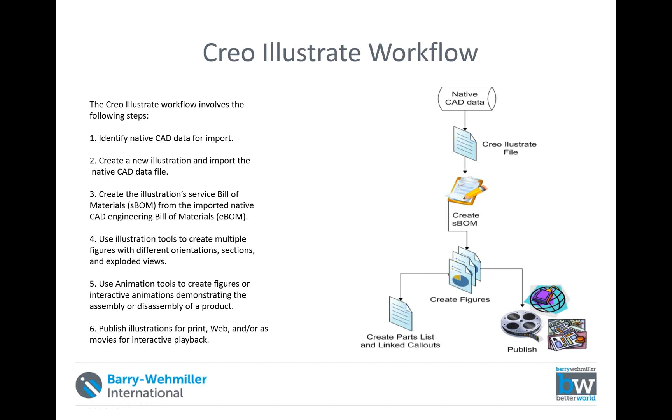The next step in our Creo Illustrate workflow is using our animation tool to create figures or other interactive animations that demonstrate the process of assembling or disassembling components from an assembly, or for servicing those components.

Now, another thing we need to look at is what are the drawbacks with the traditional methods that we currently use.

First of all, the technical information presented is in page-based documents and is actually text heavy. At the same time, whenever we create these illustrations, they have to be managed manually. We have to go back and do all those updates manually.

Now, in Creo Illustrate, we can always create a link between the CAD files we are using and the Illustrate file, so we can do those updates automatically as well.

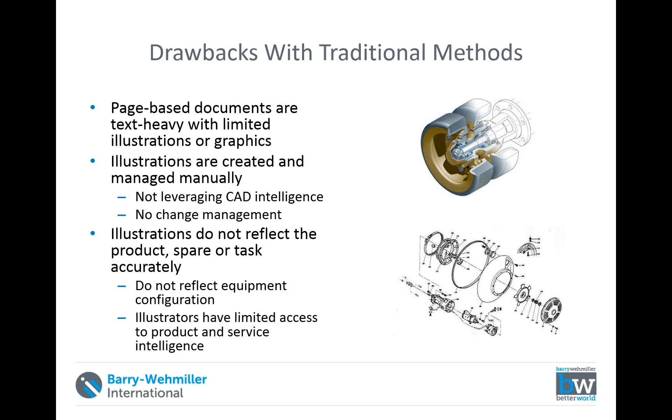Before we look into the key benefits of Creo Illustrate, I would like to open the software and look at some of its capabilities.

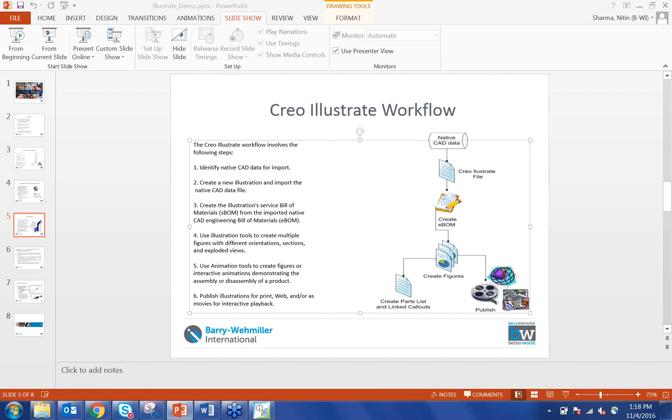For those of us attending this webcast who are Creo Parametric or Creo View users, what you can see here is that the setup for Creo Illustrate is very similar to Creo Parametric and Creo View.

Also, very similar to Creo View, we have the ribbon with different commands and different groups underneath them that we can use. The first thing I'm going to do here is simply open or import a file.

So now here is an important step. If we create the link between our CAD and Illustrate files, we can tell the system whether we want confirmation of the updates or if we want to do the update without any confirmation. That's something we can set up at the very beginning when creating these Illustrate files.

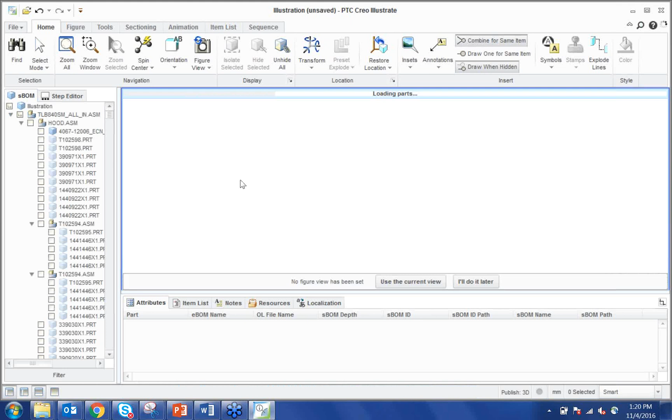It's going to take a few seconds because I'm trying to open a large model. So first of all, you'll see that the current model I have open in the window has more than 3,000 parts in it.

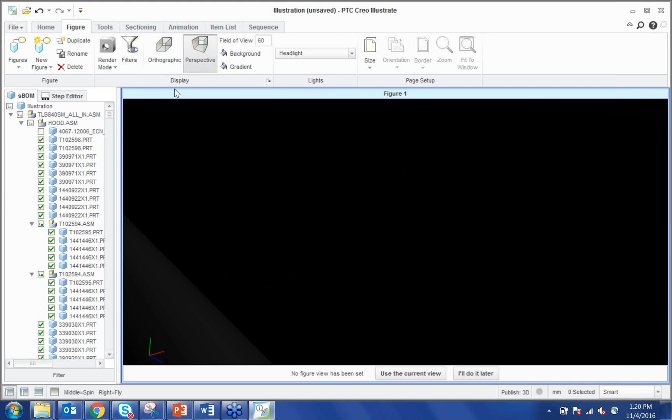Now, talking about the setup of our models, first we can look at all the different view options available to us - that is, the orthographic or perspective modes that can be used in Creo Illustrate.

Another thing that is a little different about Creo Illustrate are the mouse operations used for changing the orientation of our models. For users accustomed to Creo Parametric, they can always use the spin center, so whenever you use your mouse to change the orientation of your model, it will behave like working in Creo Parametric.

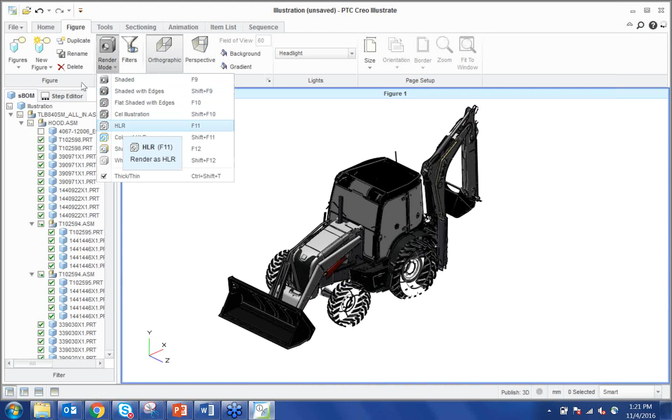Another thing we have in Creo Illustrate, accessible from the Figures tab, are all these different rendering modes. Let's give it a couple of seconds to update. One of the most popular options available from our rendering mode is this HLR.

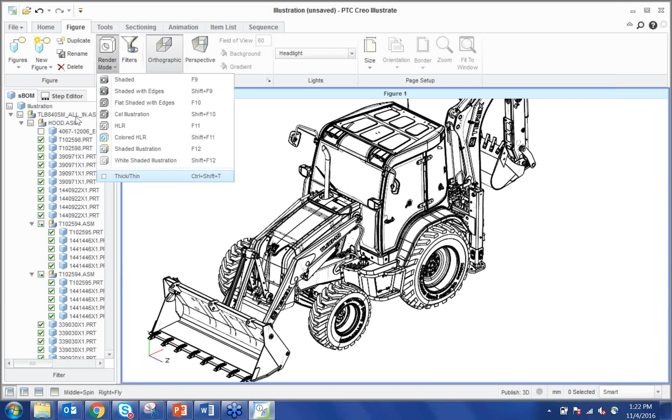Another edit capability in Creo Illustrate is the thick and thin option. If we don't want to see the minor details on our models, we can enable or disable this option with all of these rendering modes except shaded.

Once we've defined our shading style, Creo Illustrate also captures different orientation styles for your models. Usually people capture all this information with the help of these figures. What I like to do is create a standard setup for the very first figure, and I like all the components from my model to be included in it.

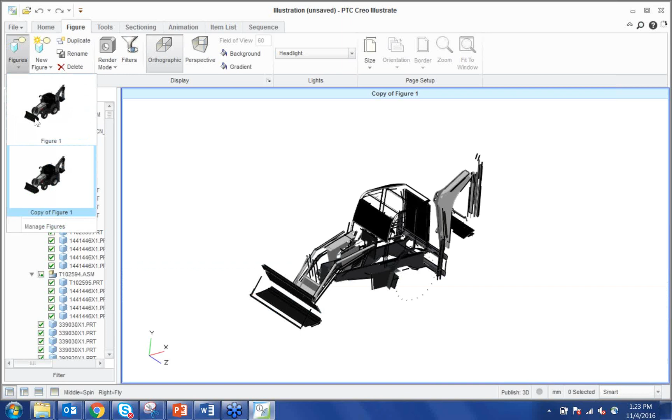If I want to add to the list of figures, I can create a new figure, or I can create duplicates. In this specific case, once we have the image created, we can give it a more meaningful name - I'll call it cross-section.

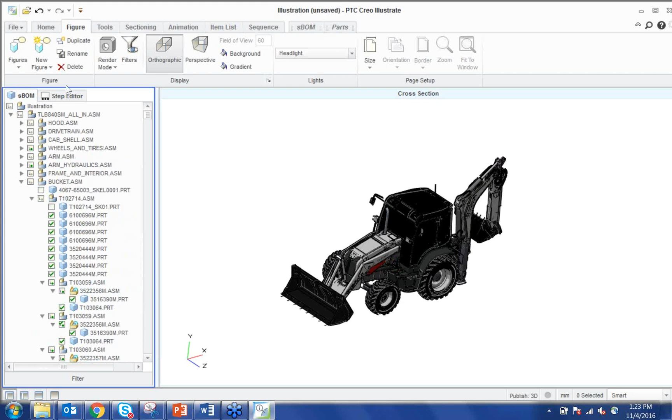Now, once I have my image created, I can simply specify which of the different components from this model I want to include in this figure or not, using the left-hand portion of the interface. Once that is specified, another thing we can do is create cross sections for our models as well. For the creation of the cross sections, I will simply go to the sectioning tab and click on the view section option.

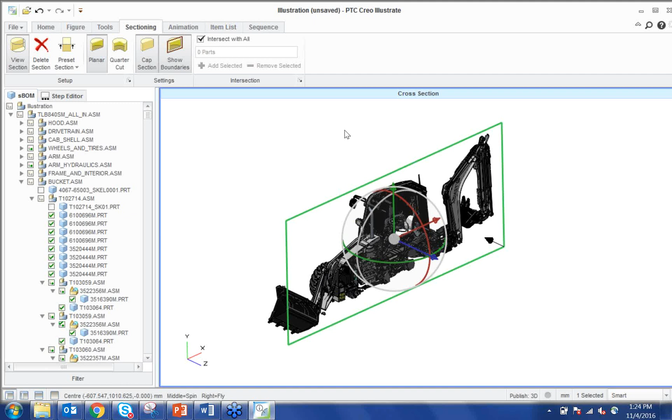As soon as the view option is selected, you can notice that we have a cross section created on the model that uses the datum plane. Now, if we want to further manipulate this cross section, we can use any of these axes from here.

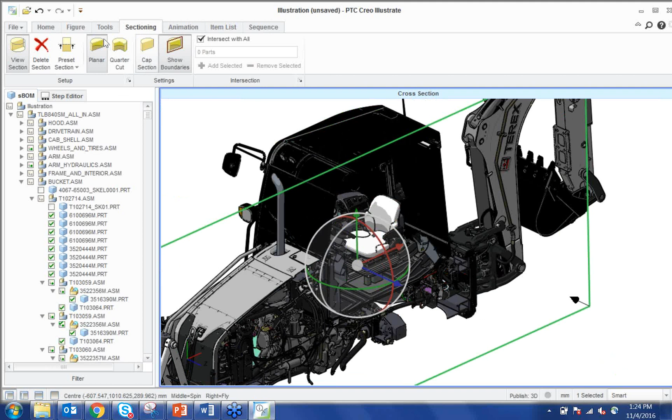Another thing that can be controlled over here for our cross sections is whether we want the system to cap the sections for the different models or not. Not only can we create planar cross sections over here, we can also create quarter cuts.

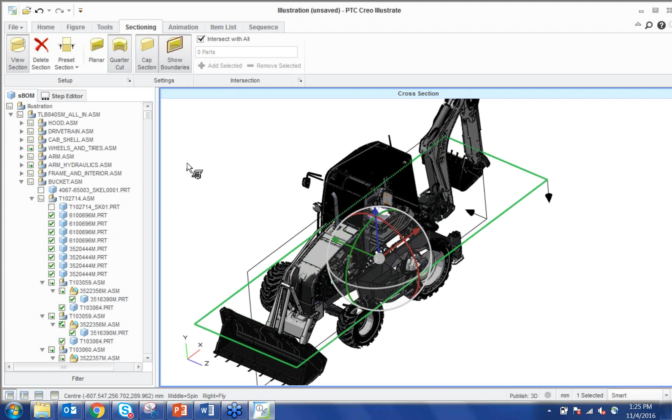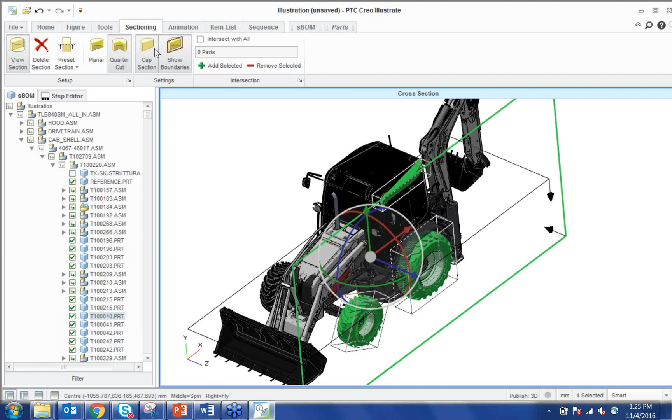By default in Creo Illustrate, whenever we try to create a cross section, the system automatically creates a cut through all the different components selected in the list on the left-hand side. Just in case I want to create a cross section on certain components or selected parts, we can use Control, select all those components we want included in the cross-section, and say Add Selected. Once we have selected those components, we can again go and manipulate it.

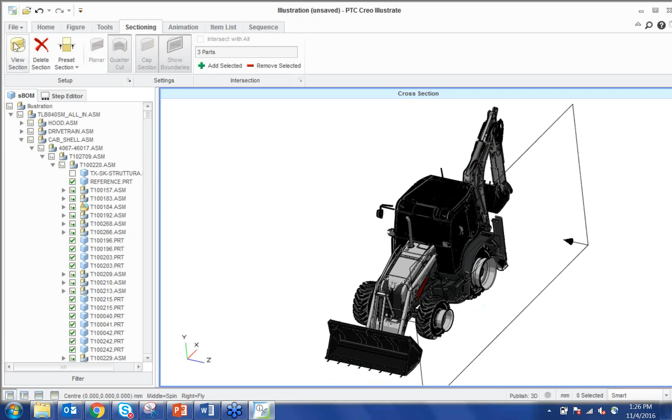Right, and just to show you that right over here. So one thing you can notice is when I'm creating this cross section, instead of the system creating a cut with all the components, it only creates a cut with these three components that are selected on our list over here.

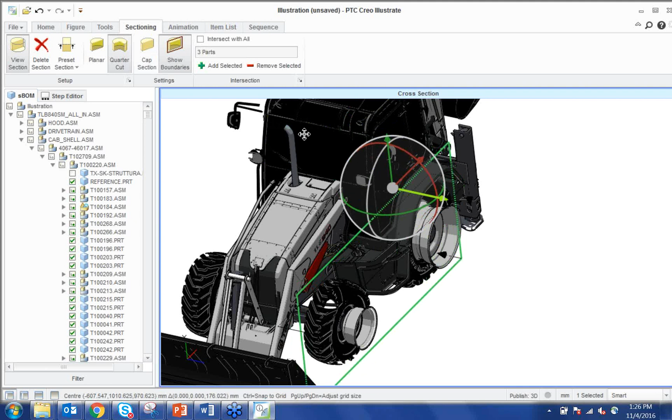Once we have done this, the next thing that can be done is, if we want, we can always create multiple different cross sections. All those cross sections can be defined using our section properties tab as well. Just in case I want to change the rotation or translation along or about any of the axes, we can come over here and manipulate that as well.

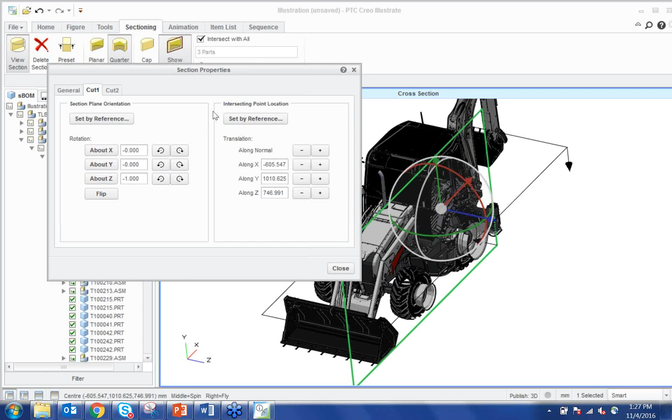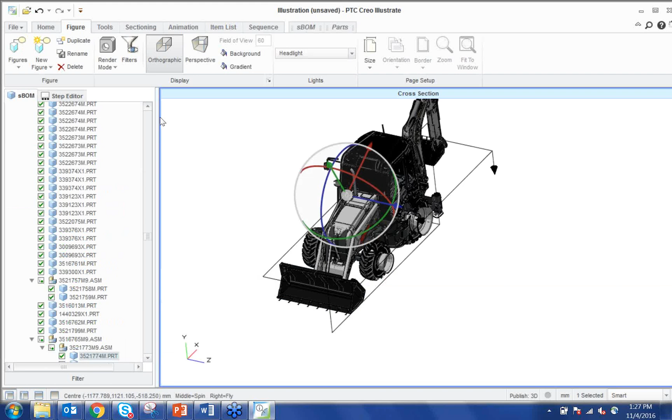Once we are done with our cross-sectioning tool, the next thing we are going to do is go back to our figures tool, to the figures tab, and create a new figure that will again be a copy of the first image we have over here. So I'll duplicate this one, and here we have the copy of figure 1 created. Once we have that, I will give it a meaningful name, and I'll call it, say, animation.

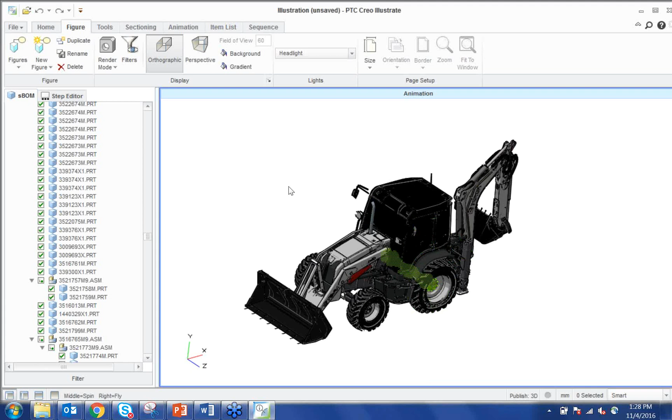Now, one of the most important aspects of Creo Illustrate is that all of these images we are creating can record the service information. Not only can these figures be used as images, we can also use these figures to capture our animation effects inside them.

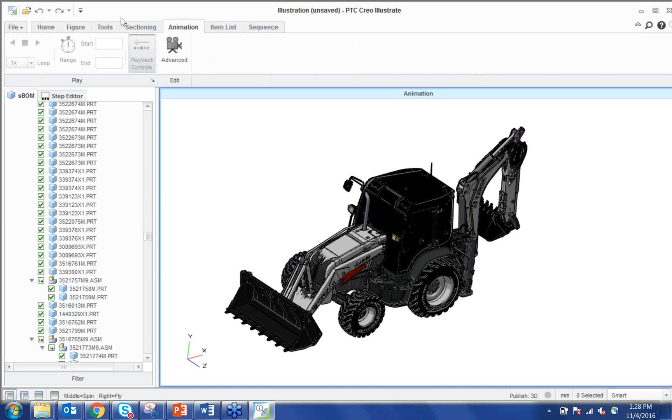Now, for this new figure that I have created, I would like to show how to disassemble some of the components from this particular assembly for servicing purposes. In order to do that, I will go to the animation tab and use the advanced controls from there.

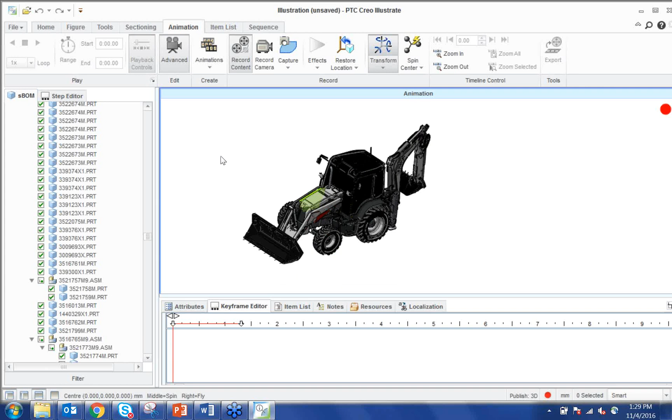Whenever we are creating these animations, the system automatically adds this portion at the bottom of our screen that shows the timeline of the animation running across the screen from left towards the right. The first thing we can notice in this animation tab is we can always record the content of these animations that we are creating. Once we have clicked on that, the next thing you would notice is this red dot.

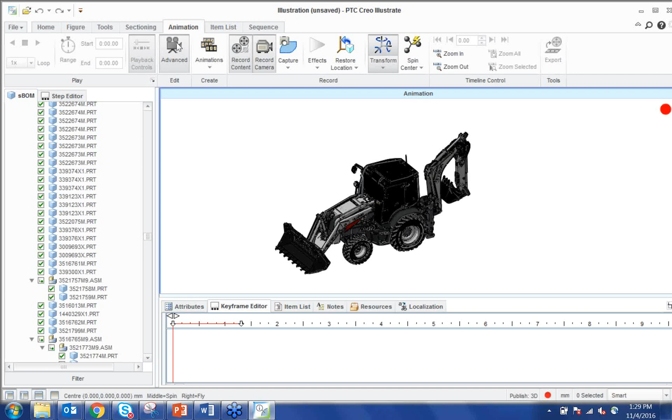Now, not only can we go and capture this content, but also we can tell the system to capture the changes in angle of the camera as well, and that will become a part of your animation too.

Now, once we have done that, I will simply go and make those changes, whether those changes be in position of any of the components, or whether those changes be the orientation of the whole model itself.

Now, just to verify over here that all these changes I have made to the orientations have been captured, I can simply go and play that animation right over here.

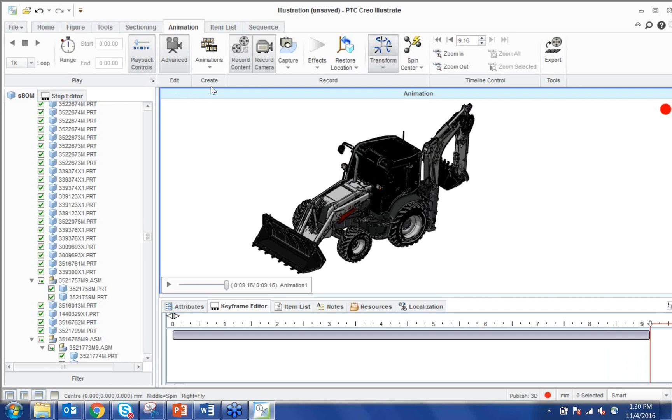Now, irrespective of what these changes might be, as I said, these changes can be made to the orientation. They can be changes made to the position of components, assembling or disassembling different parts from this assembly.

Now, once we have this animation created, another thing that we can do is we can go and control the speed at which this animation is going to run. So if we want to slow the animation down or run it at a faster rate, we can always go over here and do that.

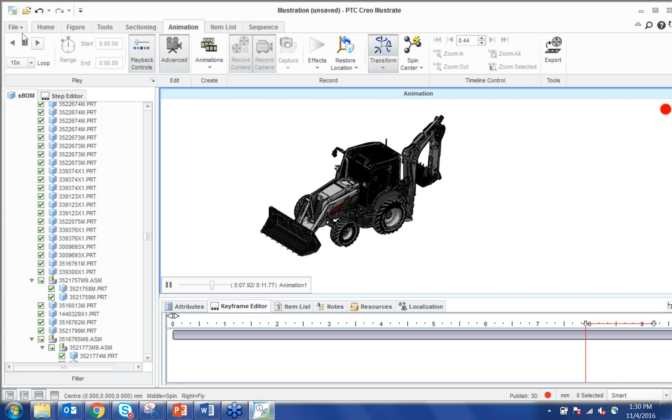Now, usually what we try to do over here is I would like to go ahead and show a certain service procedure that can be used by service technicians. Now, in order for us to go and look at that capability, I would like to go and open a different model over here.

All right, so again, starting with the first step, I would like to go ahead and create a duplicate of this image. Once I have the duplicate created, I'm going to go and give it a name, and that's going to be our animation again.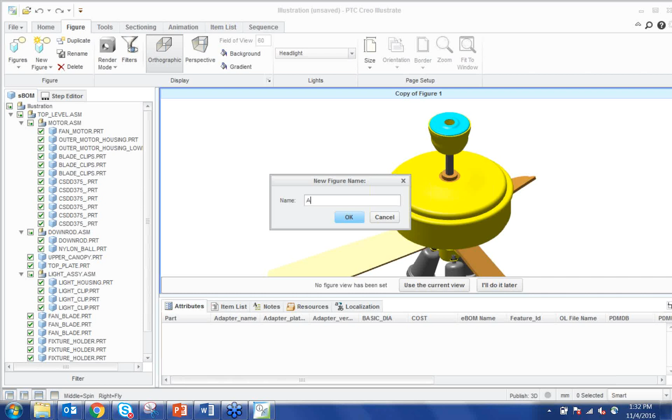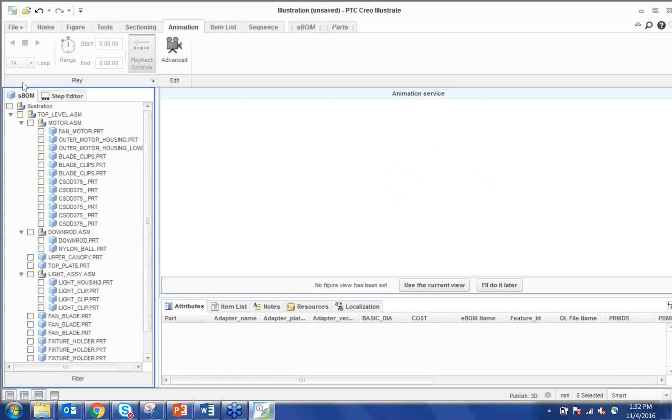Now, once we have created our figure, I will activate that figure over here and go back to our animation tabs and also specify which of these different components will be included. So for this specific case over here, I will be using our motor subassembly, and just to have it included, I will go and check this box right over here.

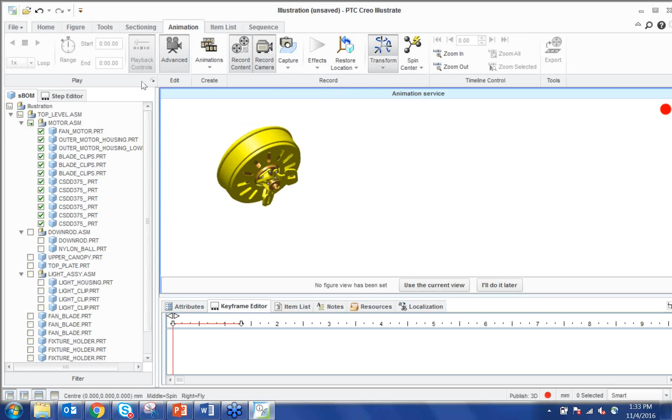Now, once we are in here, I will again go over here and activate the advanced controls. And once the advanced controls are activated, we will start recording the changes and create an animation from those changes. Now, first of all, we can go and edit the position of any of these components.

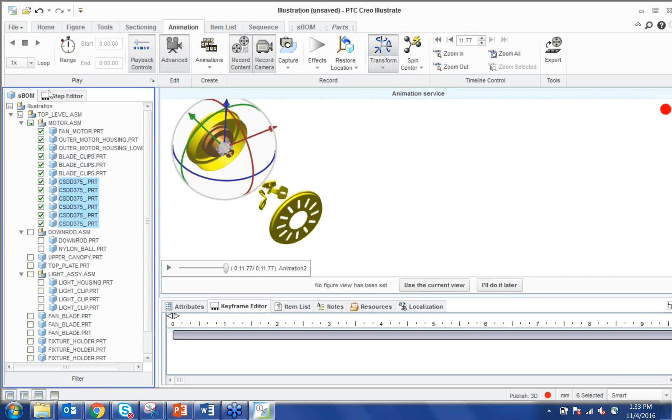And I will also go and move these blades over here as well in the direction of the green axis. And finally, I would like to move these bolts along with the fan motor to this region.

Now, Creo Illustrate right over here is a very powerful tool. Not only can we go and use this transform tool over here to change the position of our components, but also we can go and add these effects.

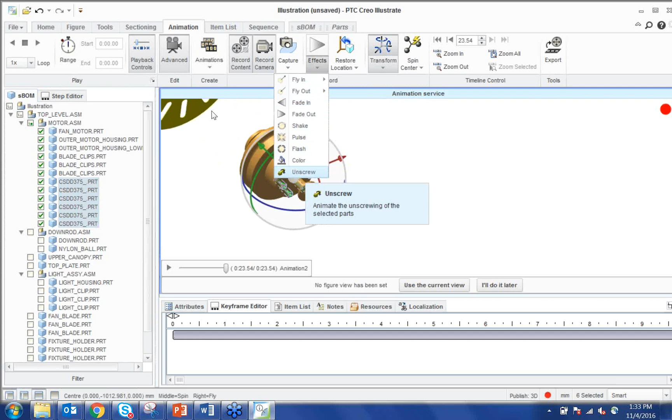So just for sake, if I do want to go and show that the next step in this specific procedure will be unscrewing these bolts from the motor part, I will simply go and select these bolts right from here and use the unscrew effect.

Now, one good thing about this is in the newer versions of Creo Illustrate, we have all these advanced options. That is, we can go and specify the direction for unscrewing these components right over here.

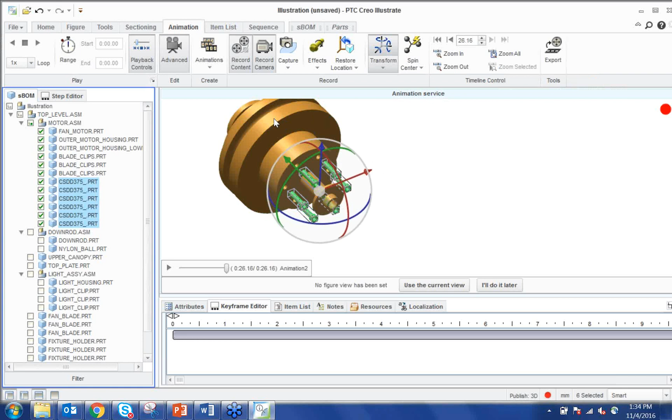And now, once we have made all these changes, we can always go and replay our animation from here.

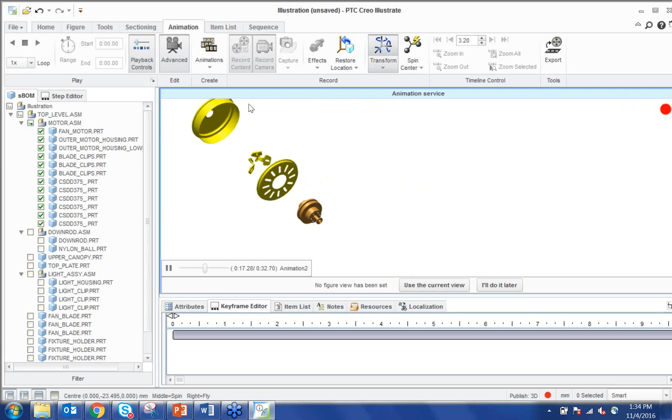Now, another thing you all would notice right over here is if I would like, I can always go back in the playing process, either using this tab over here, or also I can go and use this arrow to rewind, forward, or play this animation.

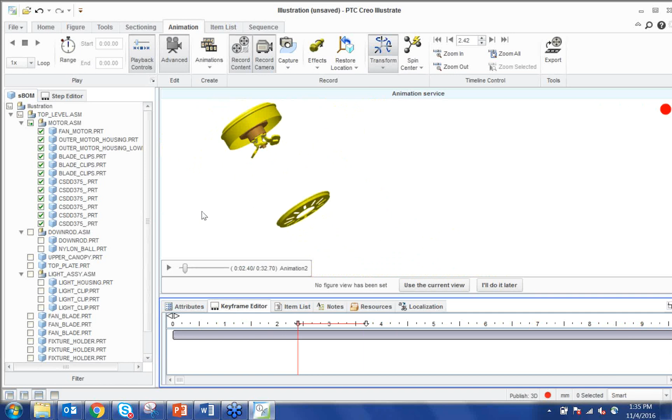Now, one thing that we also need to understand or notice in this specific case over here is that whenever we do go and create these animations, we have another column created over here that will show us all the objects that are added to your current animation and their location on the timeline.

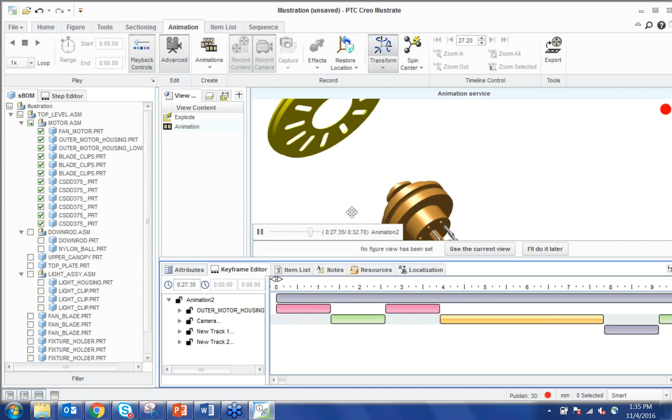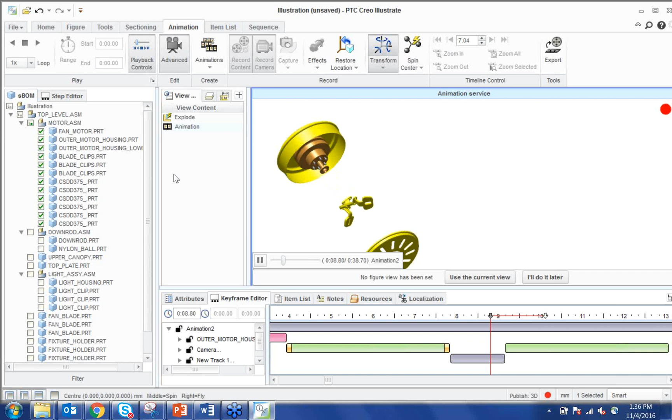Now, just for sake, at this specific step over here where I am trying to unscrew these screws, I'll just simply go back to that step and pause my animation right there.

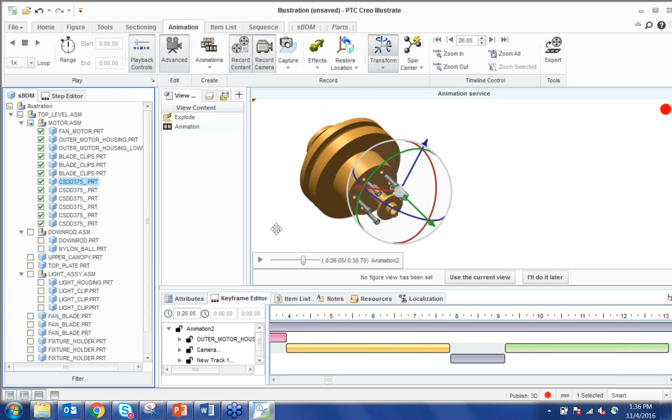Now, another thing that I can always go and do over here is if we do want to go and add multiple effects to different components, we can go and edit this timeline using these columns and the bars over here. So again, if I do want to go and add any more effects to these components, I can simply go and edit the timeline for that, and just to verify those changes have been applied to our animation, we can go and replay it.

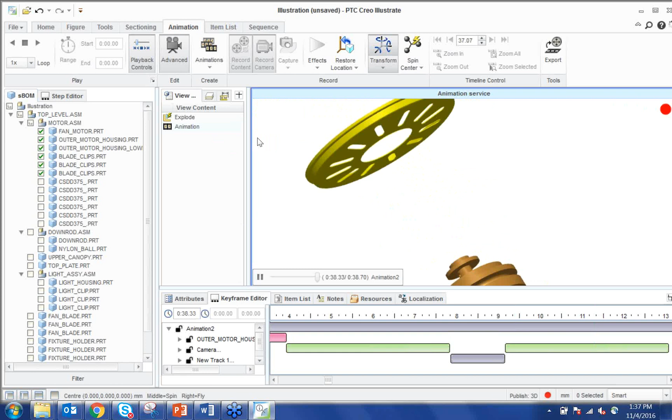Now, one last thing that I also want to talk about over here in case of our animations is any of these effects that are added to the animation, we can always go and control their display type. Not only that, once we have these animations created, we can always go and insert any of this construction geometry or any of the model nodes along with any 2D symbols or the 3D symbols as well.

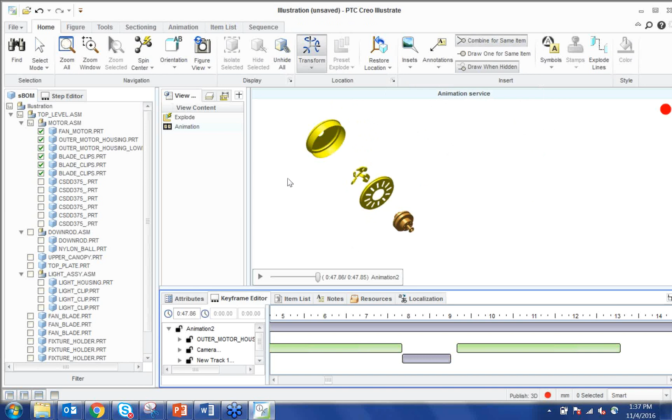Now, in this specific case, whenever we are going to disassemble this motor part along with these bolts over here, what I would like to do is add a note that the technician will look at, and he will be able to specify what is the next step or the next operation that needs to be performed. So in that case, if I do want to add a note at this location, I will simply go to my annotations and create that note.

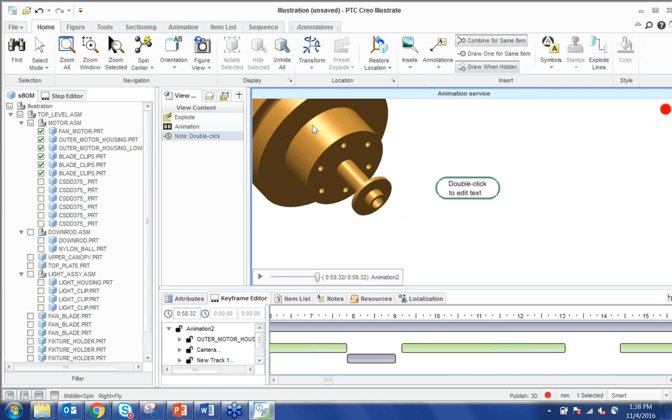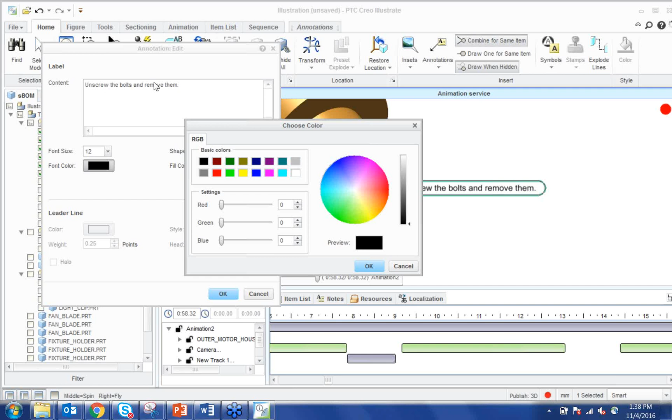Now, once we have defined this note annotation over here, the next thing that we can also control are the properties, that is how it will be displayed along with the background color. And just to verify these changes have been captured in our animation, we can always go back over here and replay our animations.

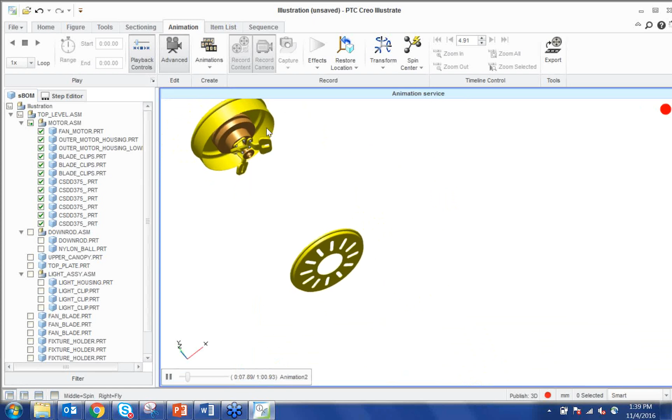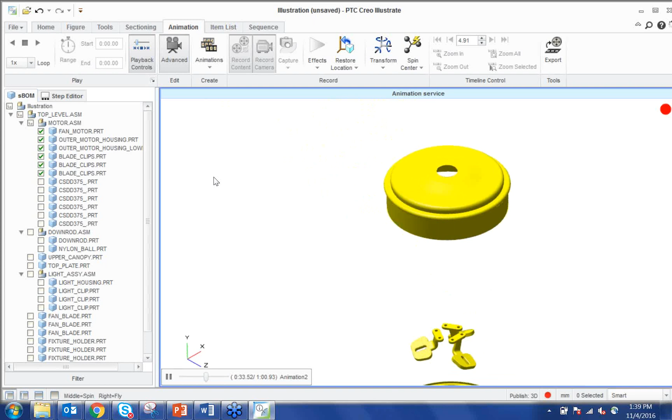So everyone, one thing that we can notice very clearly from here is that not only can we manually edit the location of these components for showing the disassembling or the assembling procedures, we can also use any of these effects that are available to us. Now, also, when we are creating these procedures over here, one important aspect that we have is the creation of these notes and the symbols that we talked about.

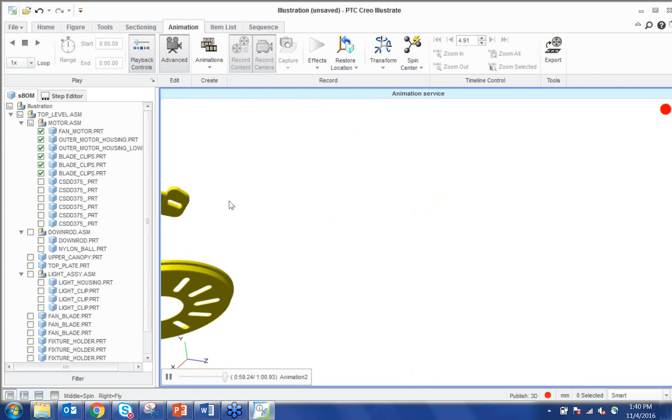And let us go back over here and wait for that. And if you all would notice right over here, once our animation has completed running, we are also able to see the note that we created over here. Now, if I do further want to continue creating this animation, I can simply make more changes to the timeline using these bars right here.

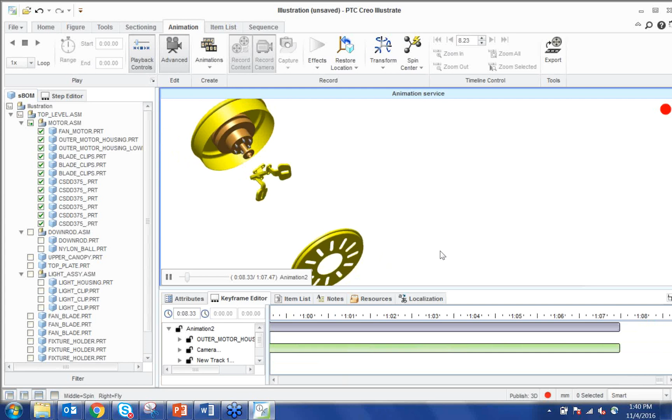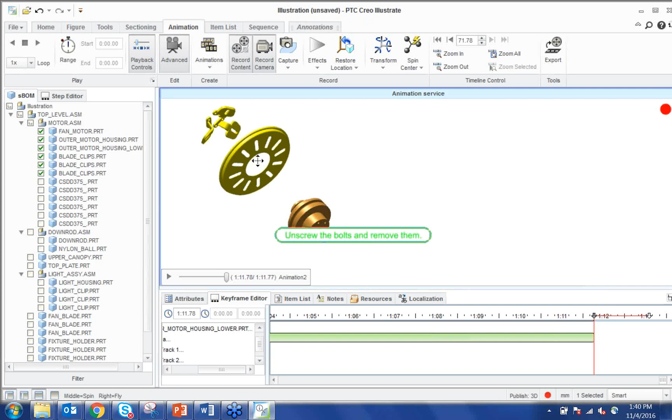And in this specific case, let us go ahead to the very end of our animation when we have created the note. I would like to scroll to that location. And right over here we have the note. What I would like to do is that the very last step of the animation that I want to create is the fading away of this note or the removal of this note. So I will simply come in here, select the note and fade it out as well.

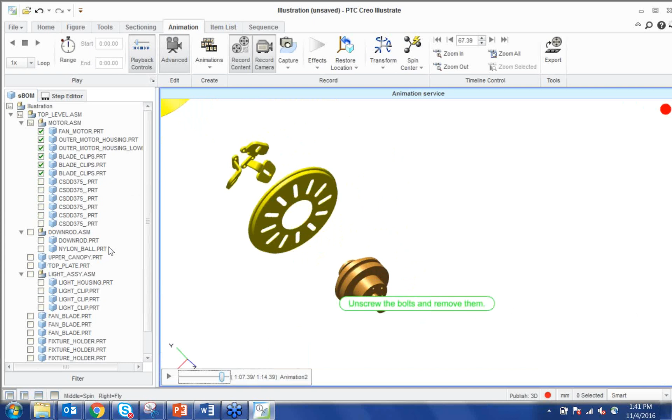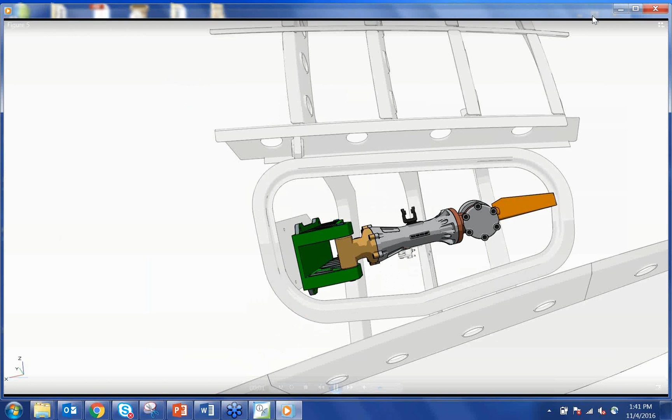And just to verify our changes have been added to the animation, I will simply replay the last 10 seconds of the animation. Now, a very simple example of an animation that I created is available on my desktop, and I'm gonna play it right here. In this particular video file, we are again demonstrating the assembling and the service procedures for some of these components.

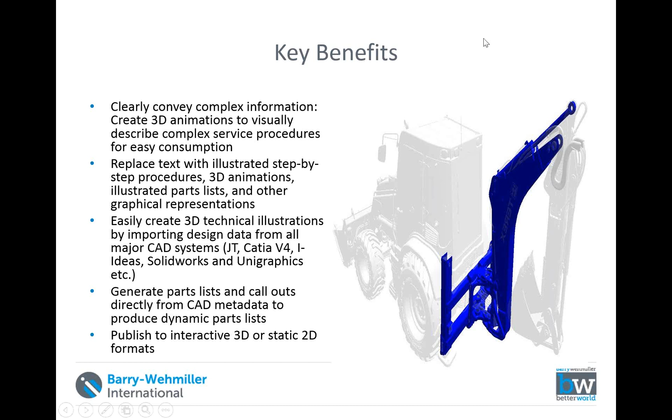Now, one thing that I do want to talk about over here is the key benefits of using Creo Illustrate: it clearly conveys any complex information inside our 3D animations. Not only that, it replaces all that heavy text information with nice and clear 3D animations that are more useful and easy to use. Another thing that Creo Illustrate allows us to do is publish any of these images and the content to interactive 3D or 2D format.

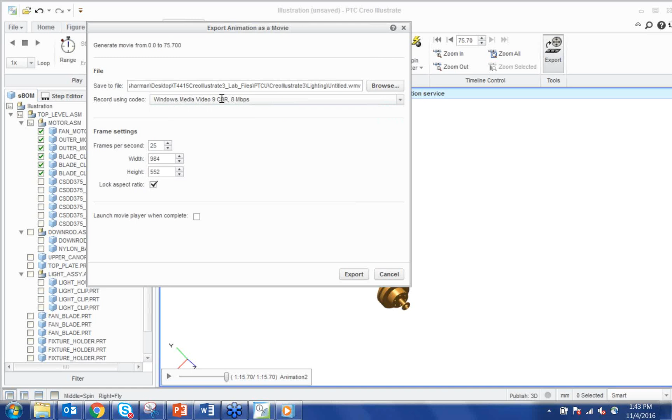So just to take a look at it, once we have any of these animations created, for exporting any of those animations, we can always come in here. We can specify the location where those files will be saved. Once we have specified that, we can also specify the codec type. And just to let you know, we are not limited to the Windows codec, but we can also add more codecs over here. And once we have defined all of these settings, we can simply save any of these animations as well.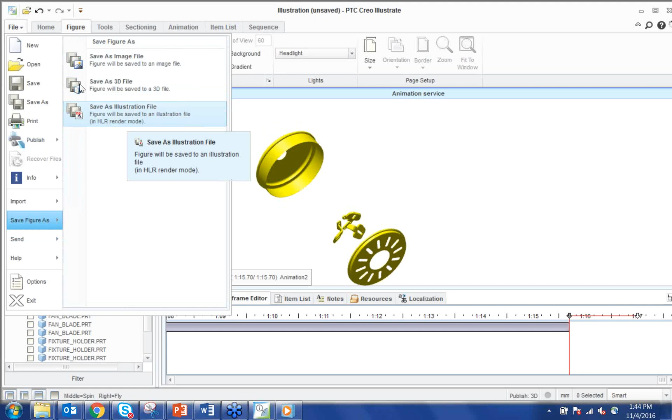Now, talking about the publication process, if we do want to publish any of these figures that we create using Creo Illustrate, we can go to our File tab and use the Publication step as well. Another thing that we can do with any of these images created using Creo Illustrate is save them either as Creo Illustrate files or 3D and image files as well. So if I do want to save this particular image from Creo Illustrate as an image file, I will simply do a Save As, specify a meaningful name for it, and also the format.

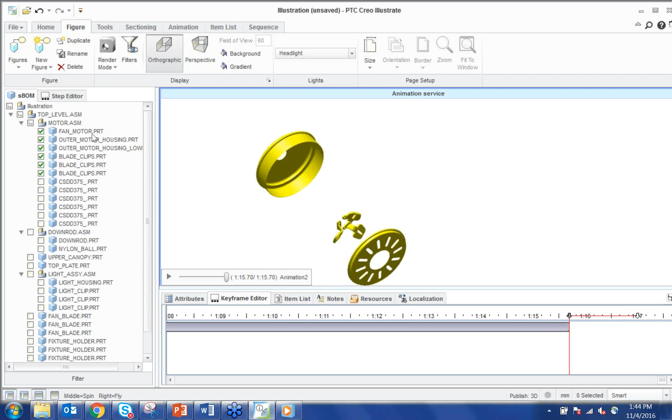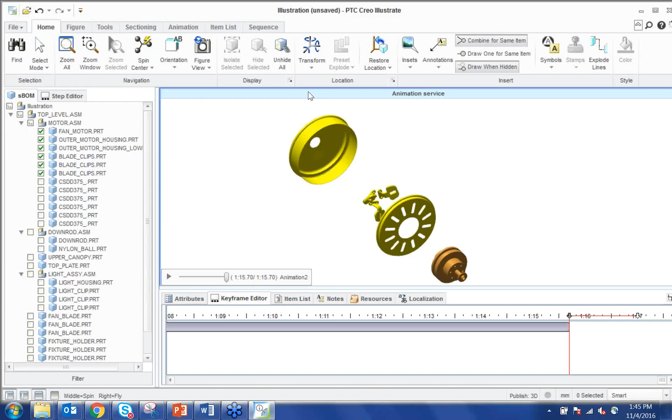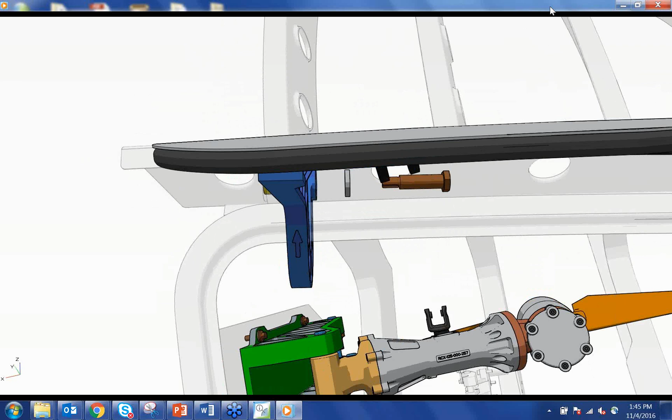So gentlemen, coming back over here to this animation that we have. Just to give you a quick overview, once we have done the export for our animations from here, that particular file is going to look something like this. Right, so let's move to our next slide over here.

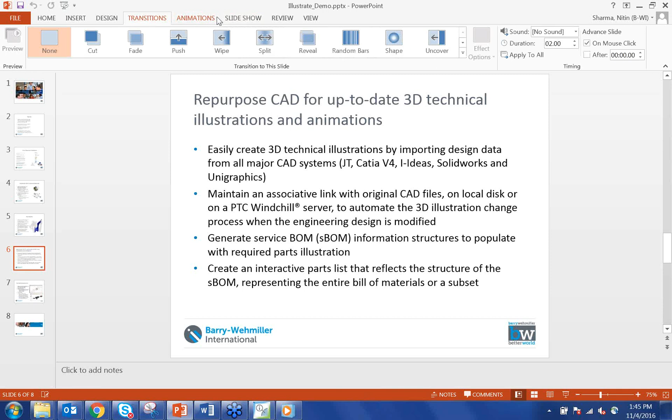Now, another important aspect of using Creo Illustrate is that we can create any of these illustrations by importing the design data from most of the major CAD systems, such as JT, CATIA V4, I-Ideas, SolidWorks, and Unigraphics, etc.

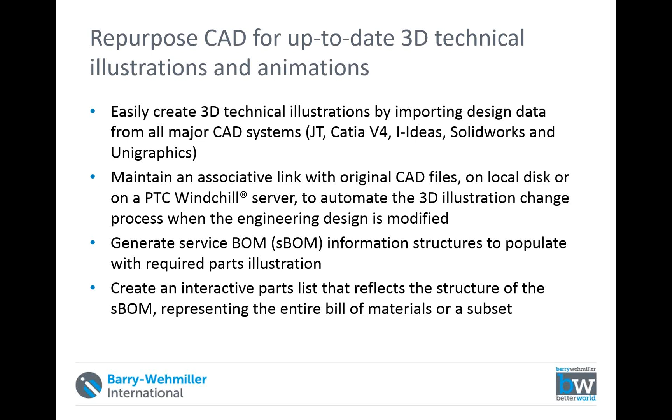Finally, talking about the capabilities of Creo Illustrate, if we want to reuse any of the 3D CAD data, Creo Illustrate allows us to do that through the creation of 3D technical illustrations, and it also allows us to save these files in different 3D CAD formats as well.

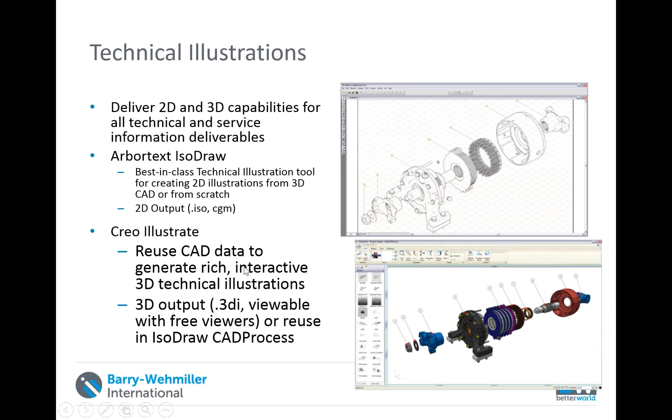So everyone, that is all that I had for today's webcast, and if you have any questions, we can take those now. Okay. Thanks, Nitin. We will do a couple things, folks. Go ahead and write in any questions that you may have here. We'll do a little business here.

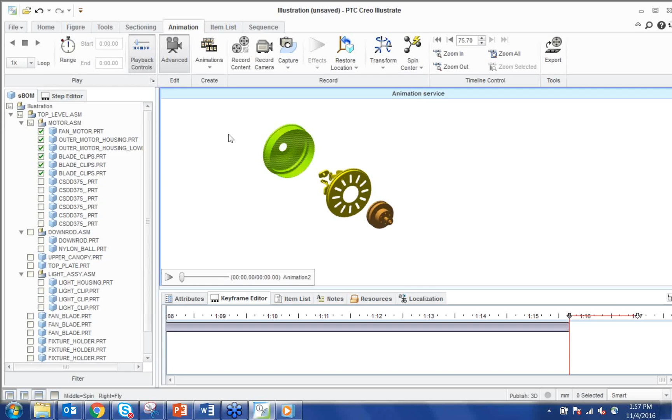All right, so if we do want to go and save these images as 3D images, we can always go and do a save figure as. And once we are in here, we will just give it a name and select the U3D format.

All righty. And that looks like that's all the questions that we have for now, Nitin. So we'll wrap this up.